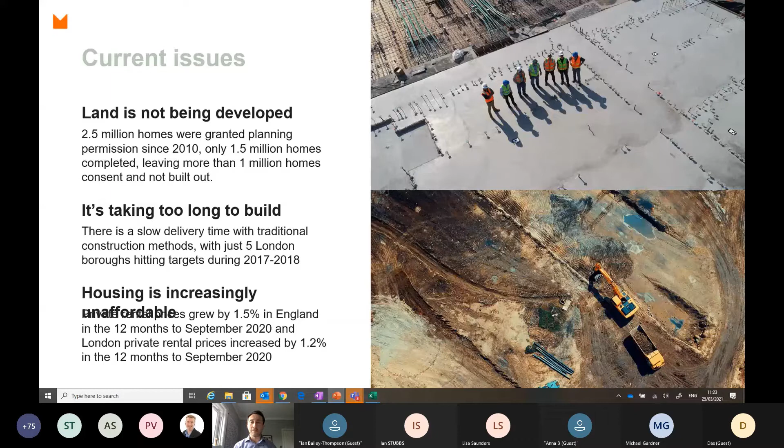And we really want to work with public and private sector landowners and policymakers to identify how parts of our urban landscape can be developed now rather than waiting for those permanent pieces of infrastructure or for the development appraisal to work. Next, please.

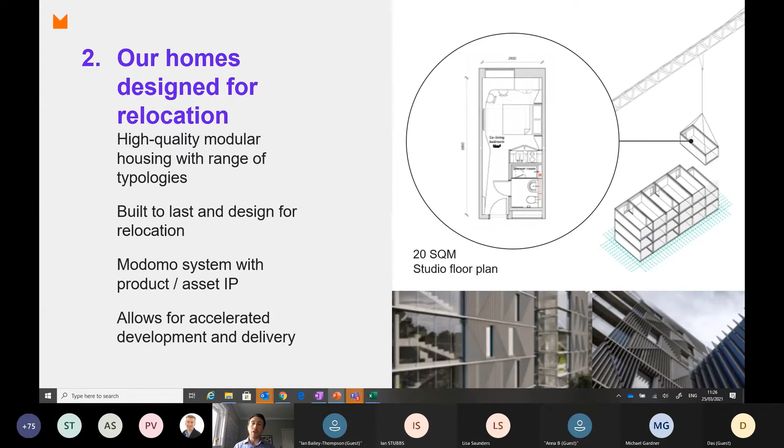Our homes, our buildings are assets. They're not funded like traditional real estate construction, which is fixed asset class. Ours are funded like a mobile asset class, much like aeroplanes, cars. That means there is a very different approach to design; it's a product design rather than a housing design. But it means that we can deliver buildings fast to site, and importantly, at the end of a lease, which is 10 or 15 years, we can then move the homes, renovate them, and take them to a new location where they can deliver more impact. Next, please.

As part of that, it's about circular economy. We really do look at every single component within our buildings in terms of why are we selecting that component, how long is it going to last, and making sure that when it comes to end of life, we have full passporting for every piece of material that we use. At the moment, about 70% of our built materials are asset based, and we really want to push that further. So obviously the building is fully recyclable, movable, but we're also now looking at foundations, we're looking at the landscaping and making as much of it meanwhile and reusable as possible.

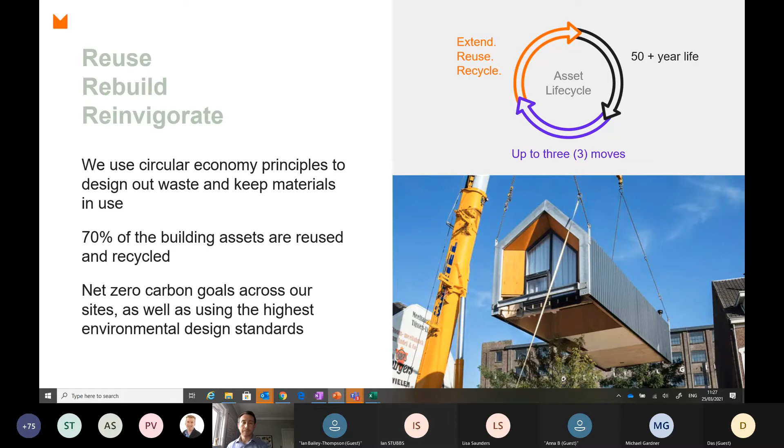Certainly over the last year, we've seen a huge focus on this and a change from commuting destinations to actually 15-minute cities and looking at how we can have everything on our doorstep, comfortable places to live, work, learn and play.

And that's something we hold really close. We want to develop communities that are self-sufficient and can grow, providing an amazing backdrop to permanent development. Next, please, a couple of schemes we're working on at the moment.

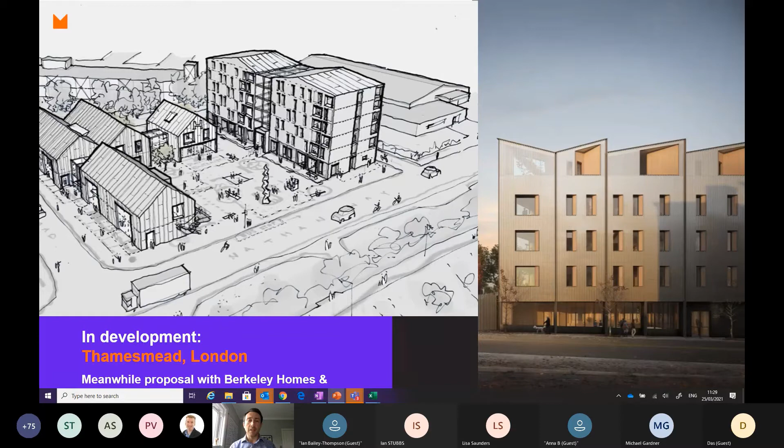This is our first project, developed in South East London with Peabody and Berkeley Homes. Really exciting development where we're delivering a residential block, and in the background a 6-storey building with co-living and live-work on the ground floor. This centres around a real change to the construction environment, whereby instead of Berkeley Homes having a hoarded traditional welfare compound, we're developing a specific kind of building where they sit as part of a community. This is kickstarting a community on a corner of strategic industrial land in South East London, a real transitional piece of land. Here we're bringing together a community hub at the centre offering food and beverage, using spaces that would traditionally be behind a hoarding as multi-purpose spaces - induction rooms, meeting rooms - accessible to the community, alongside business incubator units.

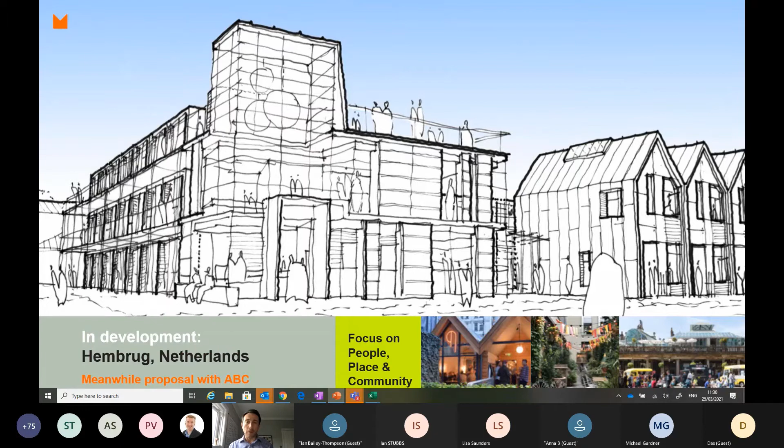Next, please. The first scheme we started developing last year in the Netherlands is a project called Hembrug, not far from the centre of Amsterdam. This is a large brownfield site with lots of historic buildings, and we're working with the developer to identify how meanwhile housing can be incorporated to immediately get a community feel and start to create place ahead of permanent development. This is a really exciting scheme where we create a community cornerstone and then introduce affordable housing alongside it to create that community feel.

Thank you. Before we move on, as we've started working in Bristol, we're aware of some of the challenges being presented. The new SDS planning policy coming through looks to demand an extra 30,000 homes in the west of England area, with a huge proportion now focused on brownfield land. But that planning policy is being delivered out over 20 years, and even the policy itself will take a couple of years to come through. In the meantime, we still have high demand for housing now. Modomo really feels it can support the west of England and wider stakeholders to start delivering homes now and rejuvenating brownfield land. So we'd love to hear from you and explore various opportunities in the area. Thank you.

Thank you, John. Wow, that was great - that passion for sustainability really came across. Certainly to me it was infectious, and a fabulous ESG ethos too. So thanks once again, John.

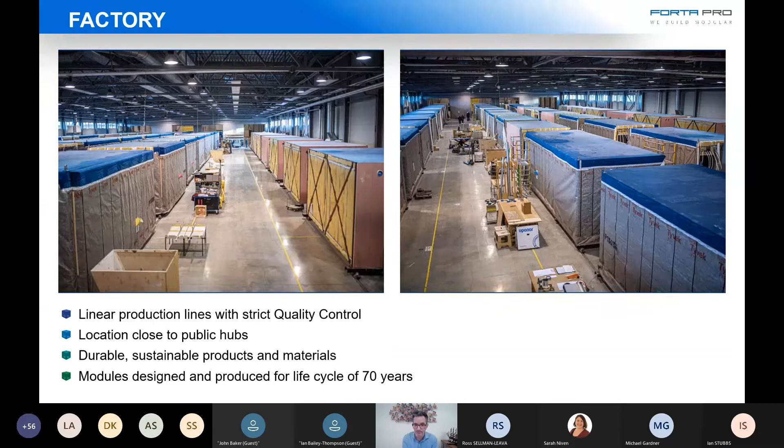The next slide will show you some of the stations. You can see the guy putting the floor, or the guy doing the tiling - that's their expertise and that's what they do all day, including the sprinkler system, furniture. We can provide a turnkey solution.

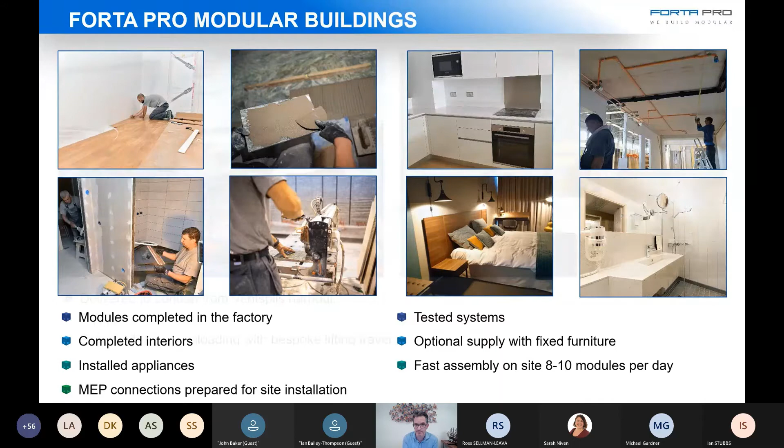So a very high quality product that is being tested throughout the production process. Then you see how we pack the modules for shipping and transportation, how we load them onto trucks or onto ships. Then an overnight sail - we're in Sweden, or 2 days, we're in the UK, in London.

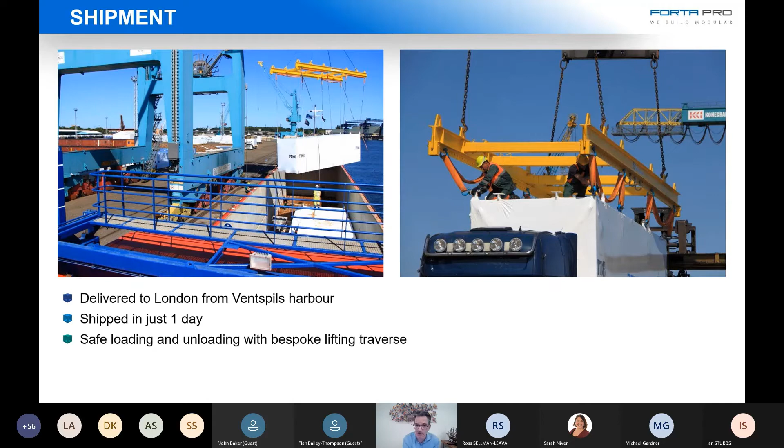If you look at the on-site work, you can see how we lift the modules. These particular photos are taken in London. You see how we lift the modules and station them at the exact location.

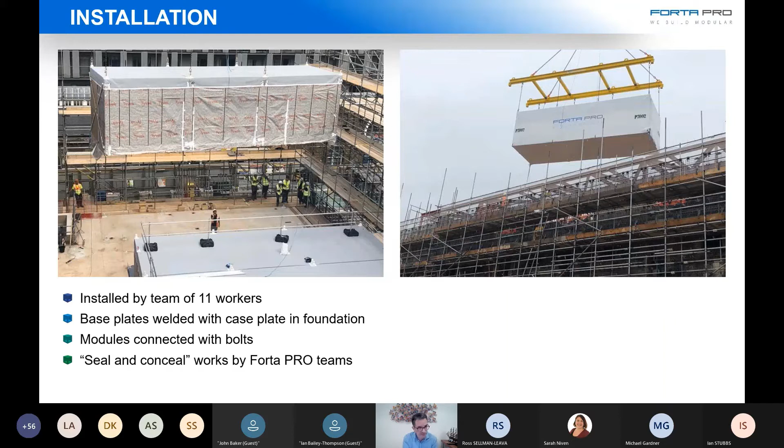The team of installers is about 11 workers. We do it very quickly - we can install 600 square meters per day. So a very quick installation process.

Some of our reference projects. The first would be the first project we completed in the UK. Recently, as Ian mentioned, it won the Offsite Awards as Private Housing Project of the Year. We are very proud of this. This project was delivered for Berkeley Homes in Royal Arsenal in Woolwich in London, a residential building, 6 stories high.

The next slide will show you some of the internal photos of how the duplex apartments look. If you notice, the duplex apartments are made out of 2 separate modules, and we can complete 85% of each module. We have an action called seal and conceal, where we zip the 2 modules together on site after the assembly, then do some finishing works to connect them - completing the floor, a gypsum board in the ceiling, final paint coat. Basically 85% of the 2 modules were completed in the factory, including the kitchen, the radiators, the staircase which you see in the photos, etc.

These are the bathroom units, and you see some of the bathroom units. Another example is residential schemes we delivered in Norway, including a passive house, so we know how to deal with thermal isolation.

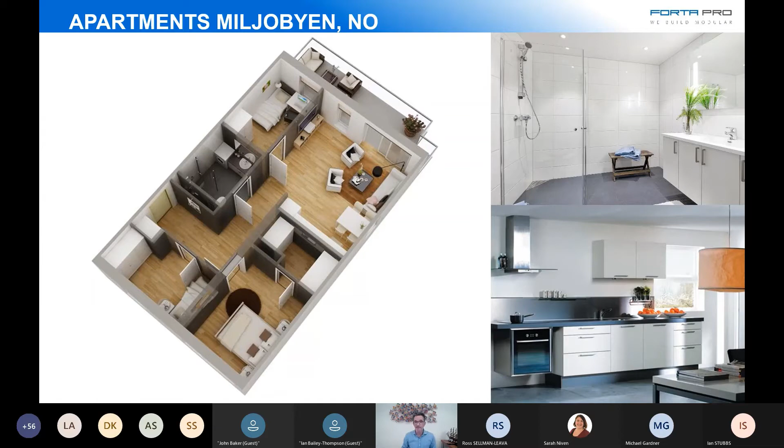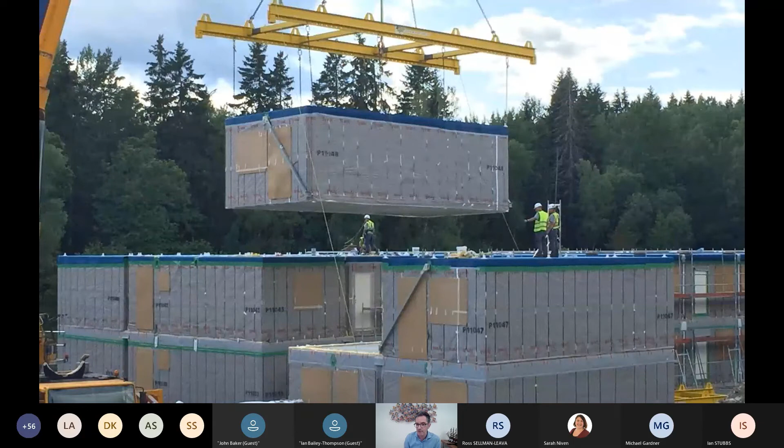Another project in Sweden, these are rental apartments, so we see a lot of build-to-rent schemes coming our way. Modular, volumetric is highly suitable for these kinds of schemes. In the next slide, you'll see some of the installation process. Again, very efficient, very quick. In 2 weeks, we completed the assembly of this project.

And this is the internal. So basically, when you go into the modules, this is what you see. This is how it was shipped from the factory. Leave the vase and plants out, but all the furniture were in the modules.

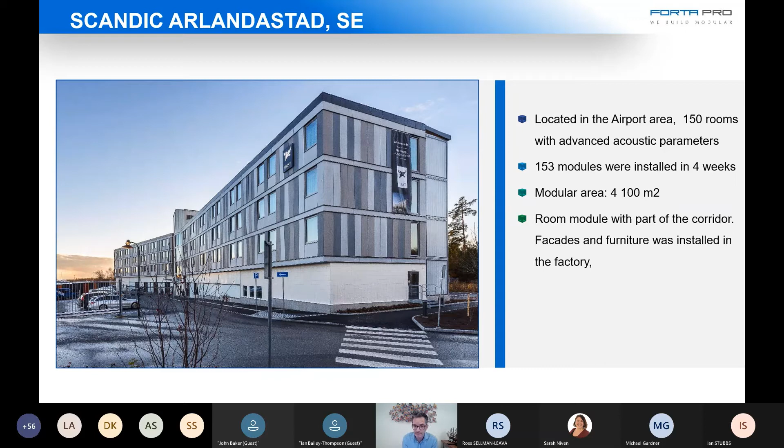Again, the kitchen, a sort of budget example. This is Scandic Hotel at Stockholm Airport, a 150-key hotel. And you can see what's unique here, that this building was pre-cladded in the factory. We have the capability of cladding the modules to some extent in the factory, depending on the cladding material. Of course, cladding in the factory saves time.

And this is the internal, so 100% completion of this room in the factory, including the bed, the furniture, loose furniture, fixed furniture, etc. And the bathroom unit - soap dispenser, hair dryer, everything is there from the factory, as you see in the photos.

Another example, Copenhagen Airport, an 88-room hotel expansion of an existing hotel. So we had to work very quietly, not disturbing the guests in the adjacent hotel. We have a 6-story freestanding building assembled in 7 days.

You'll see in the next slide - 7 days for completion of a freestanding 6-story building. This building is now weather-tight and can stand for 6 months. The main contractor then came in to do the facade, brick cladding, but we are going inside and doing the final connections inside. You can see some different rooftop modules, but when you step inside, that's what you see. So the internal fit-out, as you see here, was 100% completion in the factory.

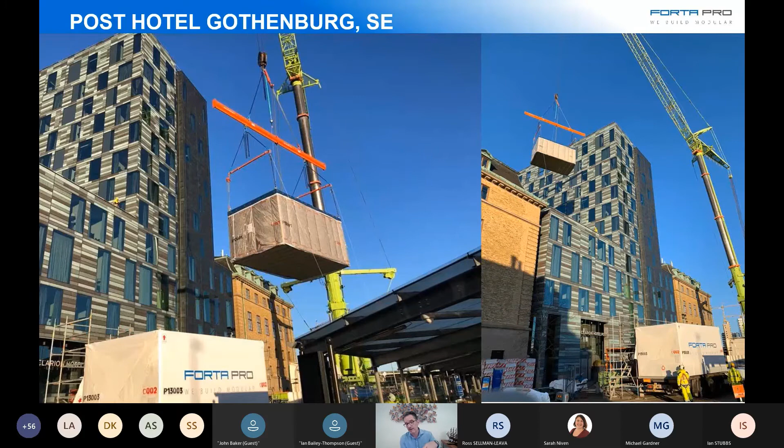A sort of more stylish hotel, 4-star Clarion at the center of Gothenburg in Sweden, a very tight location. This is, I would say, the Piccadilly Circus of Gothenburg. And you see how, without any road closure, in the next slides, how we lift the modules in the center of the city over the existing building and position them in the courtyard of the existing hotel. And this is how it looks like from the inside. You can see a very high level of detailing and finishing materials in this Clarion hotel.

This is a project now in construction, final stages of assembly - 350 rental apartments in Sweden, just outside of Stockholm, including the tallest modular building in Scandinavia. It's not so tall as in the UK, but still the tallest in Scandinavia, 16 stories. And you see how, even in snow conditions, our work keeps on going - how we lift the modules and position them next to the concrete core.

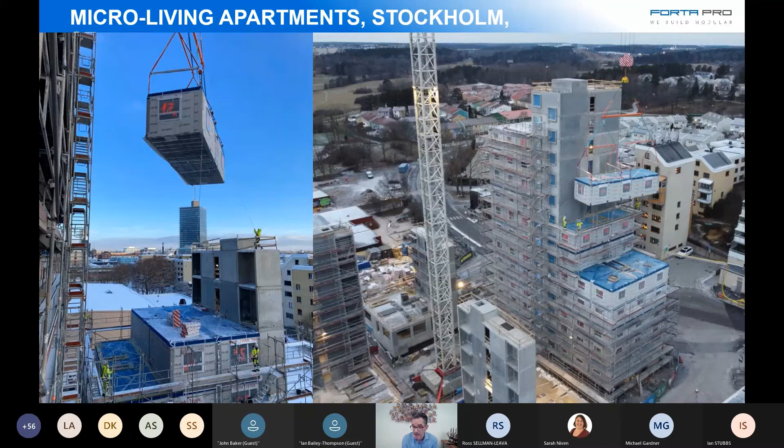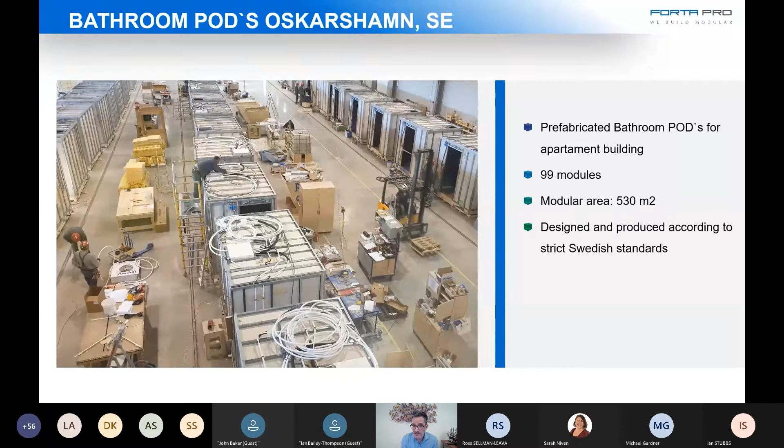Bathroom pods is another product we produce, and the next slide I think is the last one in terms of projects I want to present. This is a new hospital in Denmark. We are now delivering almost 1,100 bathroom pods for this new hospital.

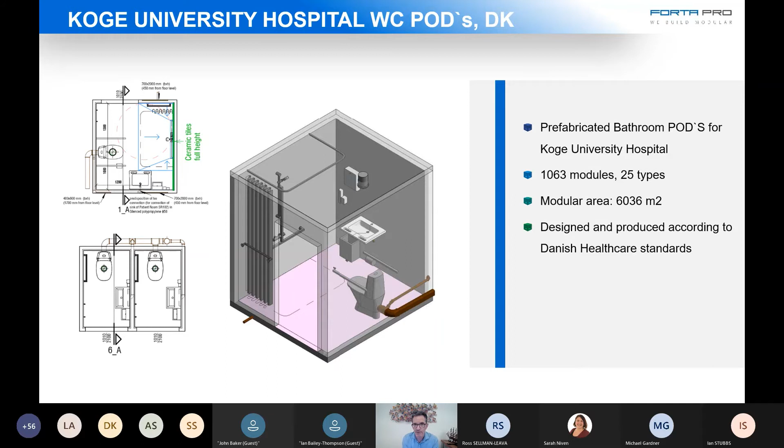So we know how to design, as I described, for student accommodation, rental apartments, residential, and healthcare solutions. We can offer you a great solution - a high quality product for your schemes.

Now, what sets us apart is our commitment to modern house building techniques. This is based on the premise of exacting quality and repeatability and continuous improvement in the design and manufacturing process. At its peak, our factory can produce around 3,500 homes per year. And we have quality checkpoints at every stage of the process to make sure our homes conform to the design and building controls.

We design and create individual modules, those watertight boxes I mentioned earlier, that come together swiftly and easily to ensure that our properties are identical in their fit and finish. Everything is inspected for quality before it leaves the factory, which means things run smoothly when we're building. We spend less time on site and we can complete projects faster.

In the picture, you can see the various stages of the factory process, which I could tell you more about, but I'm not giving up our IP that easily. Next slide, thanks.

For such a large company, L&G is unusual. We've got something called inclusive capitalism, and we aim to make society better while improving lives and creating value for our shareholders. To do this, we're investing in long-term assets that benefit everyone, from housing to renewable energy. And as I said, we call that inclusive capitalism.

The future of our planet and economy has never been so critical. Using money as a force for good, businesses, communities, and individuals can help make society stronger, creating a world of inclusive capitalism, with the UK still facing such issues: housing, climate crisis, and an aging demographic. We discover the strategies that could be employed to tackle such matters.

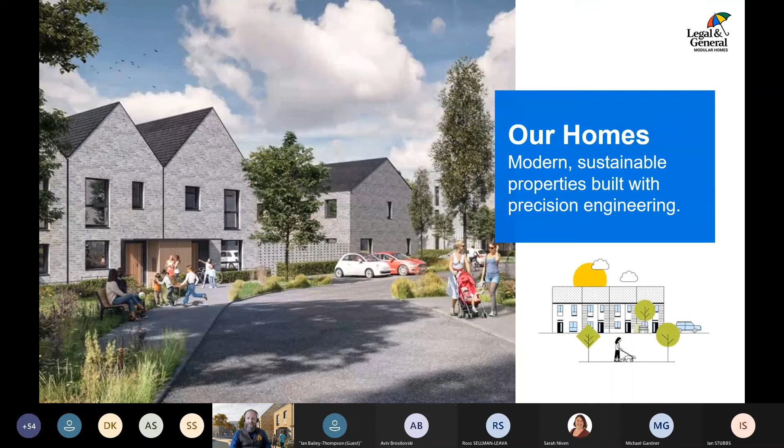Our homes are generally designed to be either starter homes or for the affordable market. So it's generally smaller homes that we're doing, although our portfolio is growing every year. But we're about making the housing market fairer for more. So we're never going to be building 2,500 square foot, 5 bedroom detached houses. That's not who we are. That's not what we want to do. We want to deliver lots and lots of good quality, smaller residential homes.

The delivery of our products is very different to traditional build. We still have to build the foundations in the same way. The infrastructure still goes in the same way, but the modules, when they turn up on site, are simply craned straight into place. And these are the finished articles. All the fixtures and fittings are in place. The kitchen's there, the toilets and bathrooms are there, the heating system's all there, and the modules are simply clipped together, zipped up on site, and that's the finished weather-tight box there.

Interestingly, at the moment, we still build the facade and the roofs in a traditional manner, which might seem like a bit of a retrograde step, but there are a number of reasons for this. One, cladding systems simply aren't as durable as bricks. Two, brick is cheaper. And thirdly, we can finish our homes in any way we see fit. So yes, we can clad them if that's what clients want, but we can finish them in any type of brick or any type of render, or we can even do them in natural stone. So we can easily meet the local vernacular.

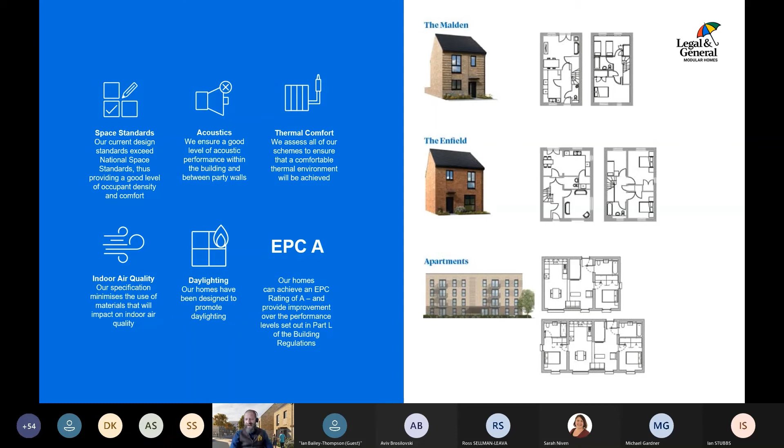So we've got 2 principal sites that we are building at the moment. As I said, we're a relatively new company, so we're still finding our way and just starting out. We've got a site at Portholm Road in Selby, and that's 102 homes. We've bought the land there, secured the planning permission, and we are on site, and delivery will start coming through in the summer of this year.

And that's going to make a real change because this is the centre of Selby, and having all of these extra homes here is going to make a real difference. This is market led with policy compliant affordable homes. Next slide, please.

And the other site we're doing is in Bristol. It's in Bonnington Walk in Lockleaze, a more challenging neighbourhood. This one we've been working in collaboration with the local council, Bristol City Council, and we've bought the land from them, and we're now looking to work with them to take 51% of those dwellings as affordable, and then the remainder we will deliver as market homes, and that's a mix of all of our different dwelling types, 2 and 3 bedroom houses and 1 and 2 bedroom apartments.

And again, that's going to help regenerate an important part of Bristol City Council's city area that they've identified for a long time. This site actually has been allocated for housing for over 10 years, and a previous application was thrown out. So that gives you an idea of our dedication of both working with the council, but also having the team that's able to get things right and make sure that we're delivering the right product.

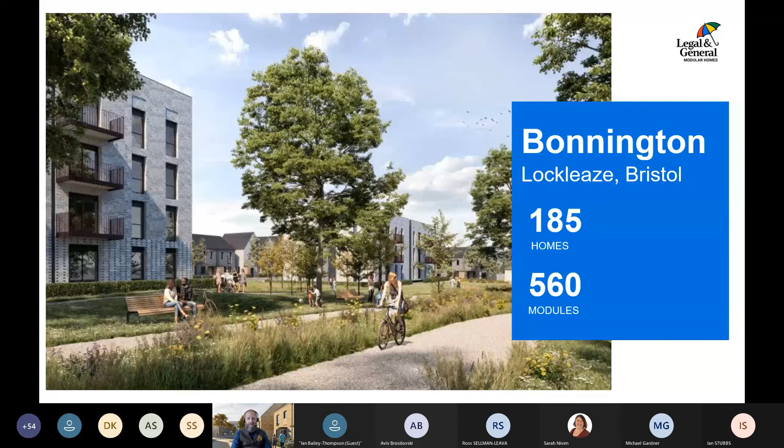Gosh, James, follow that in what's inclusive capitalism. What a great idea, great ethos. I mean, a fantastic example of what I was saying at the outset there, not just build back better, but build back greener. And I think investing in affordable homes market is a really great MMC story. So thank you very much indeed for sharing that with us.